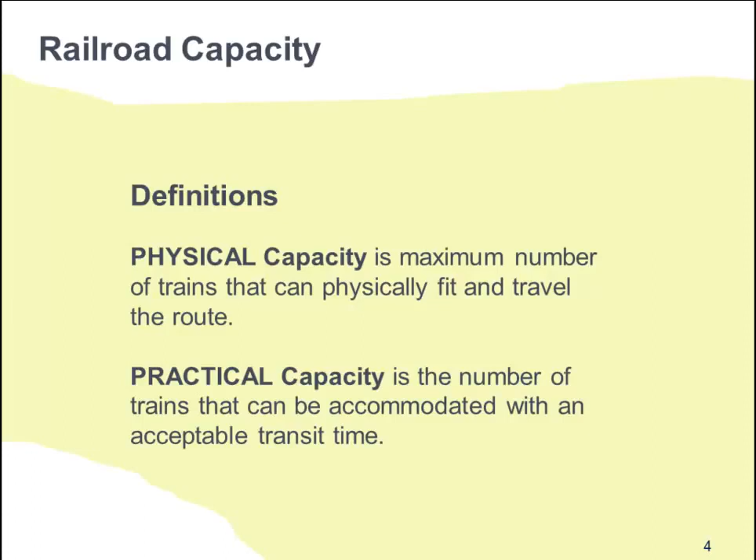In trying to manage capacity, whether one is a planner or a dispatcher, the challenges include balancing trains throughout the day, accommodating maintenance and inspections, and dealing with operational irregularities and anomalies, all while keeping acceptable transit times for the various trains. So, Dick, to manage railroad capacity, we usually think about things like how is the capacity used, how can we make the best use of it, how do we know when it's necessary to increase it. Are there any overarching comments that you think would be helpful for our listeners?

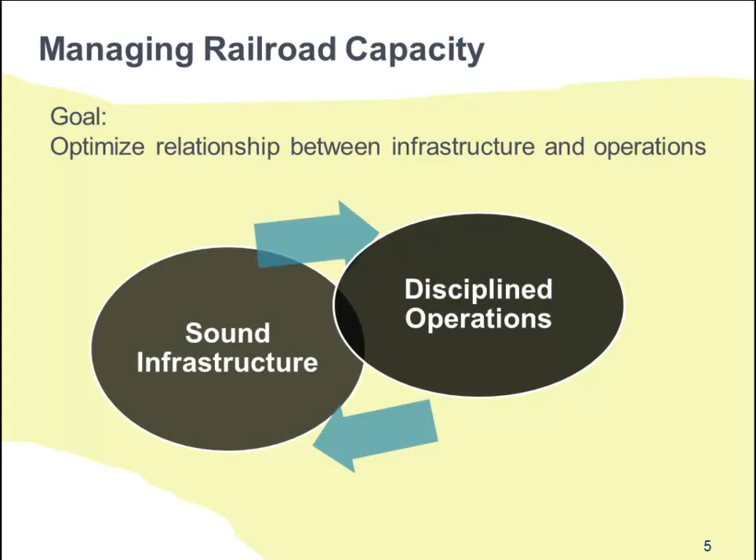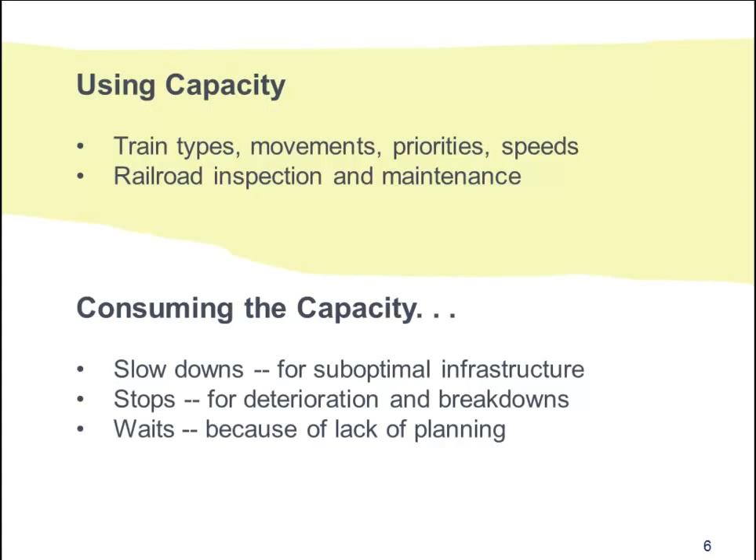Well, the way to best use the existing capacity is to optimize the relationship between infrastructure and operations. We will first show a number of examples of the productive use of capacity by trains and maintenance, and then we will show how capacity is really consumed by suboptimal infrastructure, deterioration, breakdowns, and lack of planning for operations.

In the Train Types and Performance webinar, we of course recognize trains as the prime user of the railroad. We discussed how it is critical to keep in mind the characteristic movements of the various trains in order to optimize the use of railroad space and time. And I'll recap the train types and their characteristics.

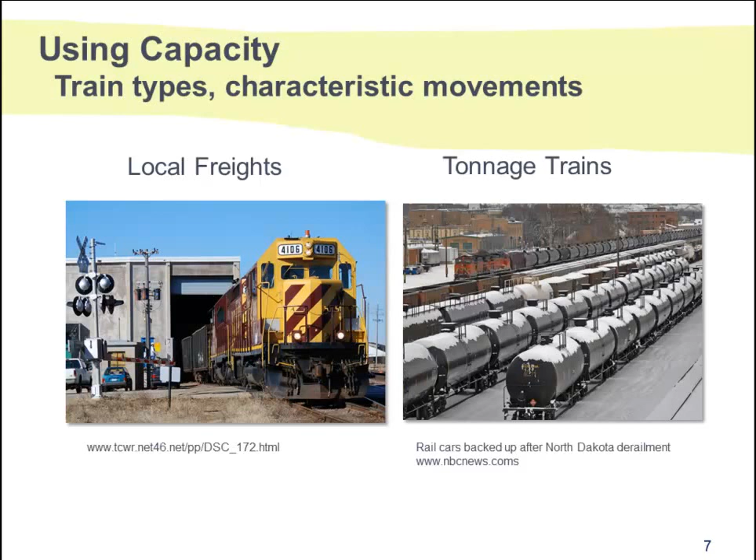Let's start with local freights. They travel between 5 and 10 miles per hour and have the lowest priority on the railroad. They can consume massive amounts of railroad capacity because of their slow speeds and frequent stops at industrial sites just off the main line. Tonnage trains usually travel from a single origin to a single destination. Even though their speed averages between 20 and 30 miles per hour, because they carry heavy loads, braking can be difficult. They are not particularly time sensitive. A few hours late is okay.

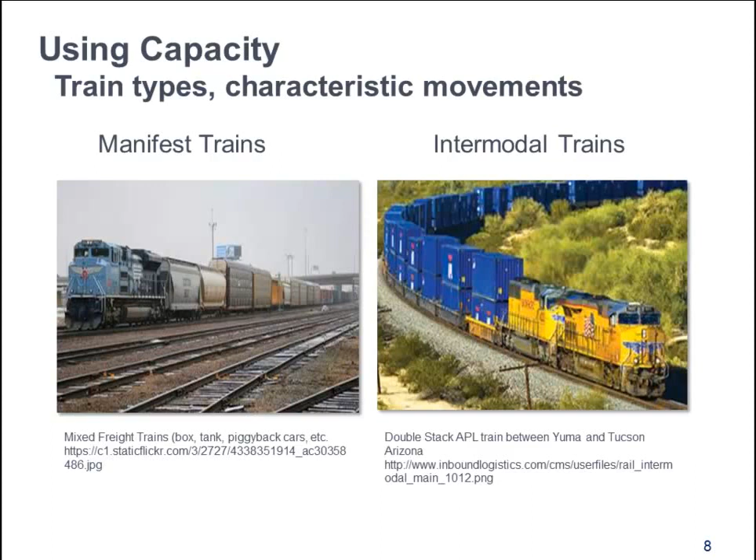Manifest trains pick up groupings of cars at distribution yards. They travel between 30 and 40 miles per hour and carry a variety of cargo, some of which may be time sensitive. Intermodal trains travel at an average of 50 miles per hour. They are the fastest, highest priority freight trains. Compared with other freight trains, intermodal cargo is lighter weight, higher value, traveling farther, and on tighter schedules.

And now for the passenger train types. Because of frequent station stops, commuter trains travel at a rather low average speed, 30 to 45 miles per hour. In peak periods, commuter trains use a lot of railroad capacity due to their frequency. Intercity passenger rail trains, by definition, connect two or more metropolitan areas. This category includes four train types.

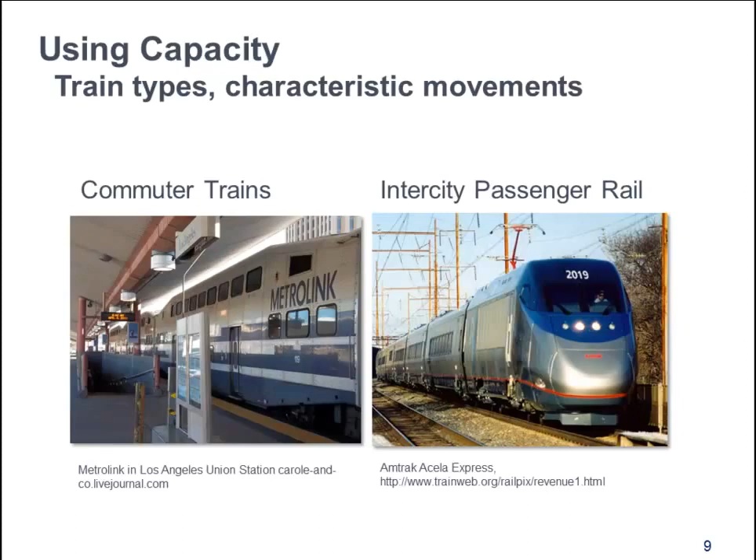Long-haul trains like Chicago to LA, which has a low time sensitivity; an hour late is not unusual. Short-haul trains like Washington to Baltimore, which are time sensitive. Higher speed trains like Acela from Washington to Boston, maximum of 150 miles per hour, which are very time sensitive. And high speed like the future California High Speed Rail from San Francisco to LA, which is over 200 miles per hour maximum, which is extremely time sensitive.

All right, thanks. Well, let's move on now to another use, which is railroad inspection. Track inspection per 49 CFR Part 213.233 is driven by the class and type of track and whether the track carries freight or passenger or both. Mainline tracks carrying passenger trains are required to be inspected twice weekly via high rail cars, like the ones shown on the slide. Tracks higher than Class 5 require track geometry checks and other types of checks.

Suffice it to say that on the main lines, the inspection via a high rail truck at 10 miles an hour takes a lot of railroad capacity. And if something needs to be fixed, even more time is consumed.

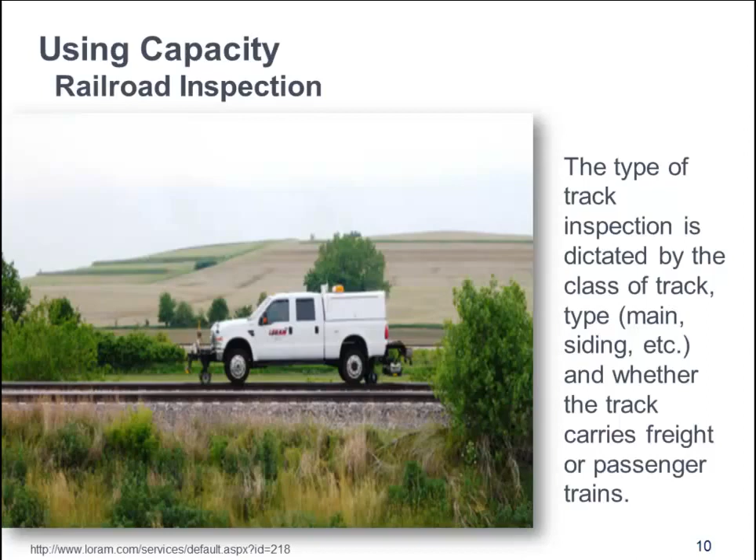And of course, inspections take place during daylight hours, which is prime time for train movements, especially passenger trains. So, the last part of using capacity, we're going to talk about railroad maintenance. Note that heavy maintenance, such as tie and rail replacement, or work requiring large on-track equipment, typically is scheduled for 8 hours of uninterrupted time. Double-track maintenance requires worker protection, flagmen, and horns to clear the track being maintained, while a train moves on the other track. Maintenance on a single-track railroad usually takes the track out of service completely.

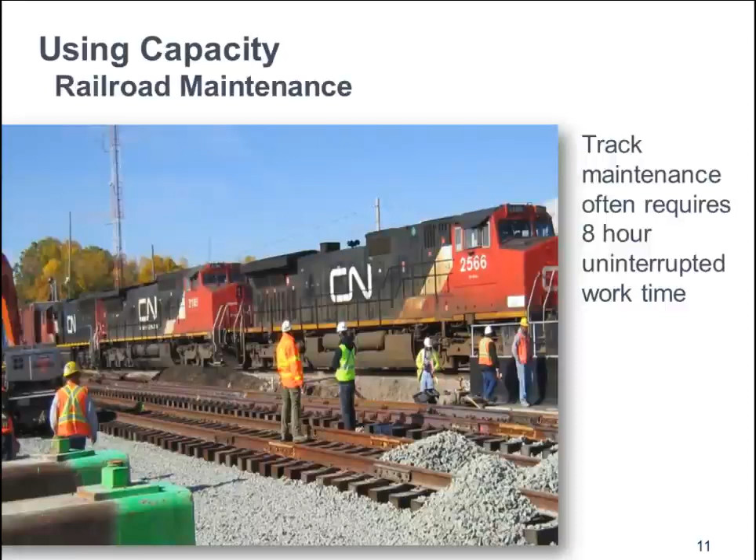Well, thanks, Dick. Now let's talk about consuming capacity, which is the less productive, inefficient uses of railroad capacity. All right, first up is an example of single-sided platform consuming capacity. Okay, we see the negative operational effects of this situation on many corridors. A single-sided station platform can change the whole traffic pattern, especially with commuter rail, because of the frequency of the headways, and the operational effects can be huge.

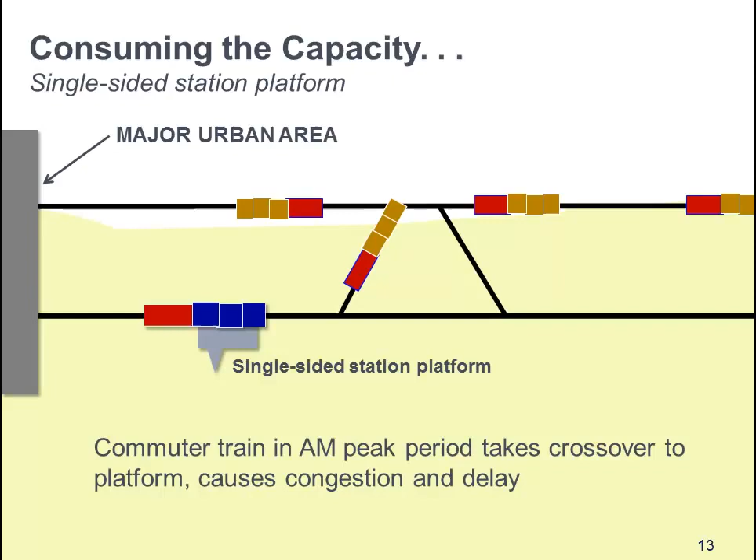In the diagram shown, an inbound commuter train in the morning peak is on its way to a major urban area. The commuter train has to cross over to access the platform. All the inbound and intercity trains have to follow, and this, of course, is on a double-track railroad. Meanwhile, outbound trains wait to make the crossover move in the other direction. How can we make better use of the existing capacity? Simply installing a platform on both tracks at the station is the obvious answer. This is a relatively inexpensive improvement that benefits all traffic on the corridor.

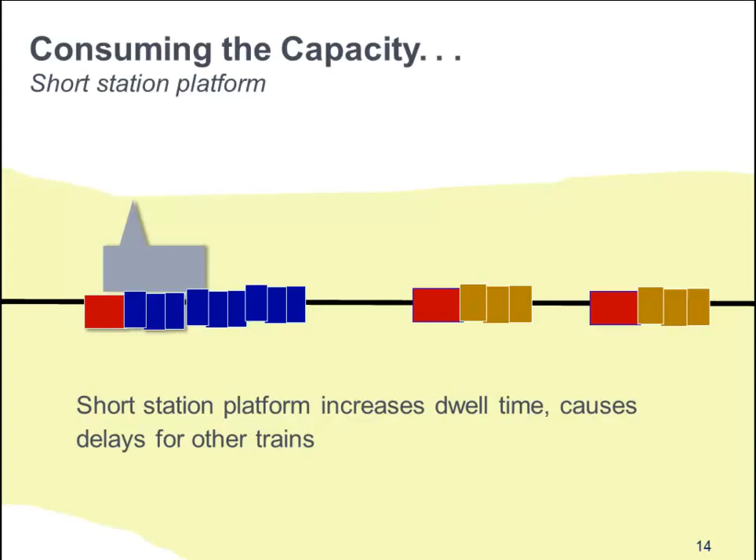And our second example is about platforms that are shorter than the train. Certainly, when the train is longer than the platform, passengers have to move to the front of the train to exit, or whatever doors are open. And boarding is also more bunched on the platform. This all produces longer dwell times as a result. If the station is on the main line, longer dwell times become delays for all the traffic on the main line.

All right, and this is the third example here. We have suboptimal infrastructure conditions, and we talked about that in the track configuration webinar. Yes, each condition slows train speeds on the main line. As we discussed in the track configuration webinar, remedies include adding bidirectional signals and signalizing passing tracks at an appropriate spacing.

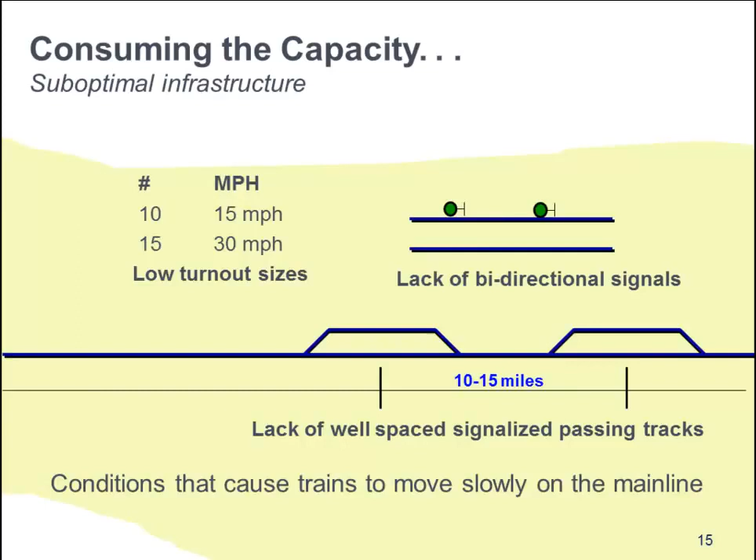So here are two examples about parking on the main line. What's that about? Yes, in both of these cases, the main line is essentially used as a rest stop. The first is caused by the absence of a holding area. As an example, at a transfer point like Chicago, if you have unit coal trains coming from the west and the cars are to be transferred to another railroad and the receiving company is not ready to take the cars, they can be parked on the main line. Doesn't this mean that one of the mains in the double-track railroad is out of service? You got it. Construction of holding areas or yards takes acreage and money, but it can save a lot of railroad capacity.

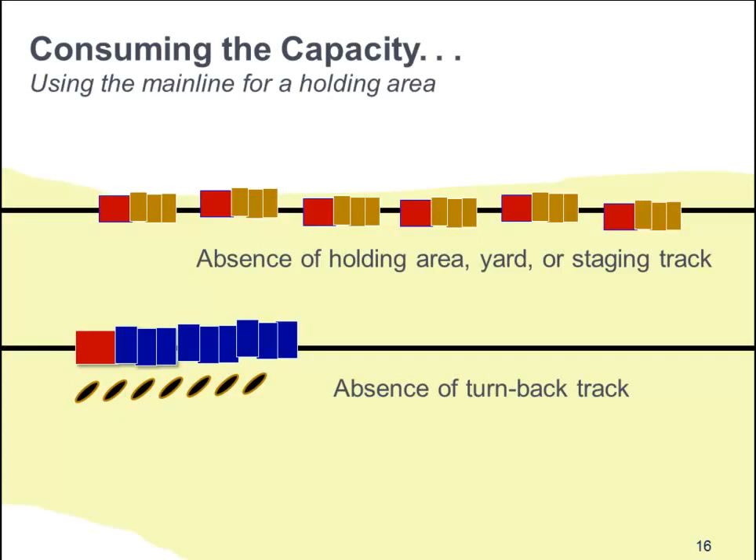The second example of parking on the main line is caused by the absence of a turnback track. In many corridors, we see commuter trains, especially zone express commuter trains, turning back on the main line. And with commuter express, this can happen 6 or so times in a peak period at both ends of the line? Yes, the negative operational effects on the traffic on the main lines are huge. The remedy, of course, is to install a separate turnback track or spurs so that the train can change direction off the main line without parking on the main line.

All right, we're going to talk about a new category of consuming capacity, and this is around deteriorations and breakdowns. Okay, this slide shows an example of track deterioration. Track defects are a leading cause of train accidents, and when accidents happen, railroad capacity is definitely consumed. The example shown is track buckling. The Volpe Center's 2003 research showed an average of 38 derailments per year due to buckled track. Inspection and maintenance are the only ways to keep track deterioration in check.

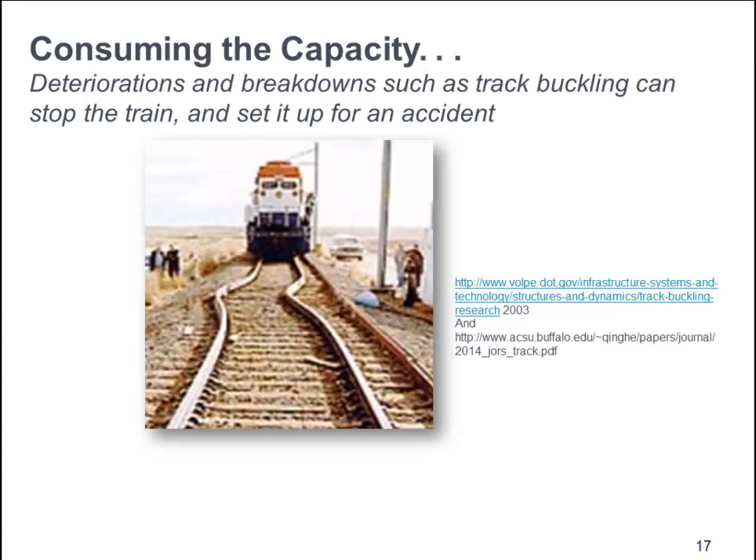What is particularly disturbing about buckled track is that the signal system will not detect the buckling. The rails still conduct the electrical energy in the track circuits, so there is no signal warning for an oncoming train of the conditions ahead of it. So we can also lose capacity from failures in the train equipment itself. Consider this example. During peak periods, the Hudson River tunnel carried 40 to 45,000 travelers per hour. In January 2014, commuters were stranded on a train that lost power and stopped in the tunnel because of a broken catenary wire. And Dick, what's an example of a train control failure?

Well, we had a recent example of a lightning strike that hit a central instrument house of a major interlocking at a junction outside of Boston. The thousands of wires inside the house became a fused mess of copper, causing a massive slowdown of all trains. This was a particularly bad incident. Lightning strikes during summer thunderstorms happen rather frequently on radio towers that dispatchers use to remotely control switches or hit the track circuits.

All right, so now we have the last category of consuming capacity, and that's the lack of planning for operations. Many problems occur because of the lack of planning. Planning does not solve everything, but it can go a long way to avoid unproductive consumption of railroad capacity.

Introducing passenger service on existing freight routes means introducing a uniform schedule into a non-uniform schedule freight world. A disciplined approach is required to ensure the passenger trains run on time. Freight varies greatly by day of week and weight of train.

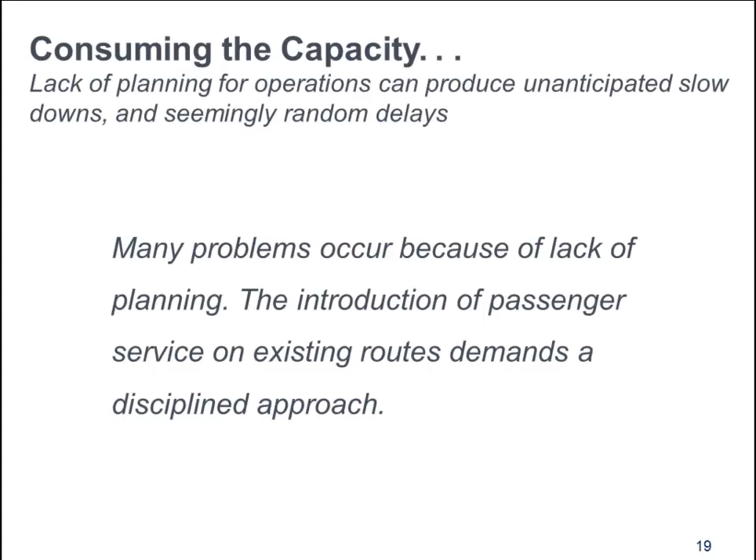Class 1 railroads adhere to a certain amount of scheduling because they have to balance locomotives and crew moves. But Class 2 regional railroads and Class 3 short lines often ignore the benefits that scheduling could bring. The mindset has been, it will get there when it gets there.

Thanks, Dick. Well, now we're going to move on to how to manage capacity. And what are the building blocks and tools we're going to use? Well, to move towards a more disciplined approach to operations, we will talk about developing a schedule. Then we will touch on TPC, or Train Performance Calculator modeling of a single train, and RTC, or Rail Traffic Controller modeling of all the train traffic on a corridor. For planners and engineers who are developing new service, the schedule, the TPC, and the RTC are important tools.

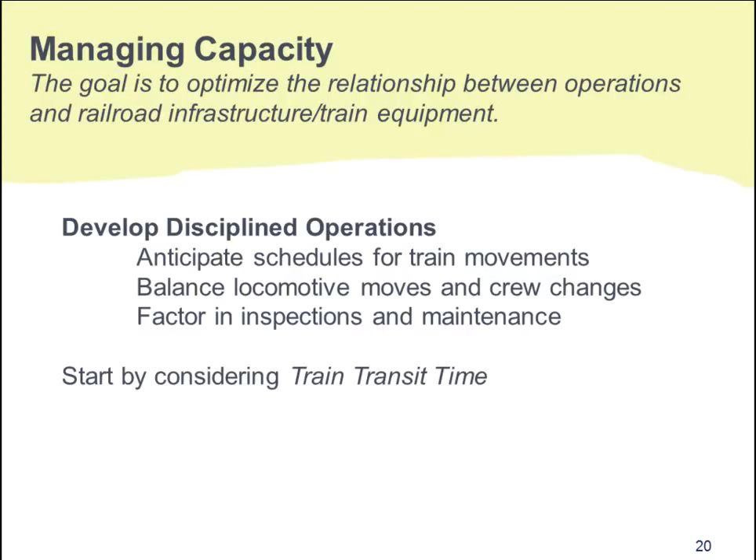To start, however, let's look at the aspects that make up train transit time. What is train transit time? Train transit time is the time a train or trains can reasonably expect to travel a certain route given various factors such as the type of the train, the minimum run time or free running time, stopping distances, slowing or speed restrictions, and other expected delays over the route.

When considering all trains together in a corridor, transit time becomes a function of the number and kinds of trains on the corridor, their speeds, their stopping patterns, priorities, whether they have a uniform or non-uniform schedule, how they interact with other trains, which includes the train densities, potential anomalies, headways, overtakes, crew time limits.

All right, thanks. So let's start with the headways. What is a headway? How can planners and engineers use headways to make efficient use of the railroad capacity? A headway is the time between two successive trains operating on a railroad. An ideal headway is the time between trains that is required to avoid signal restrictions without hitting a yellow signal or a red signal that would slow them down or cause them to stop.

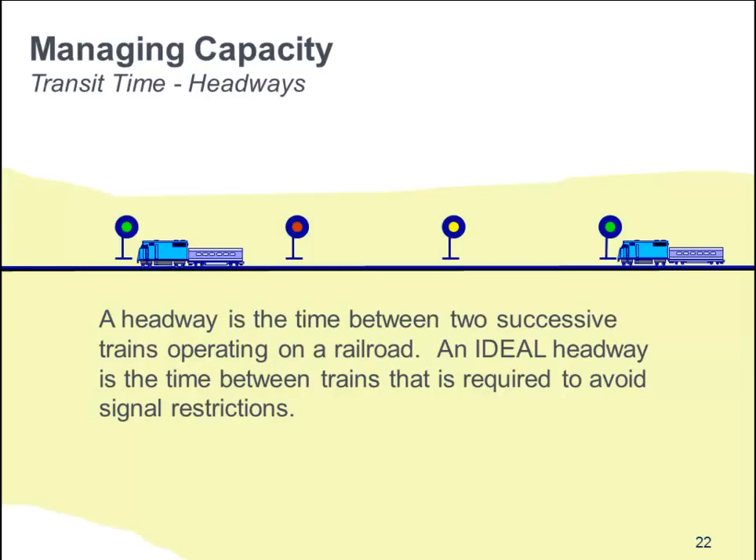As a general rule, closer spacing of signals permits more trains in a set period of time. So closer spacing of signals is a way to increase capacity. But of course, you still have to provide for the worst case braking train distance out there to set the block length. All right, let's now move on to overtakes and meets.

This diagram shows a passenger train overtaking a freight train. The freight train moves into the passing track. Planners and designers have to identify where it would be efficient for a passenger train to overtake a freight, don't they? Yes, a good example would be from San Antonio to Houston. This is a 200-mile long route for a passenger train with no intermediate station stops. As the passenger trains typically run at 79 miles an hour on this route, this is a good candidate location for overtaking freight trains.

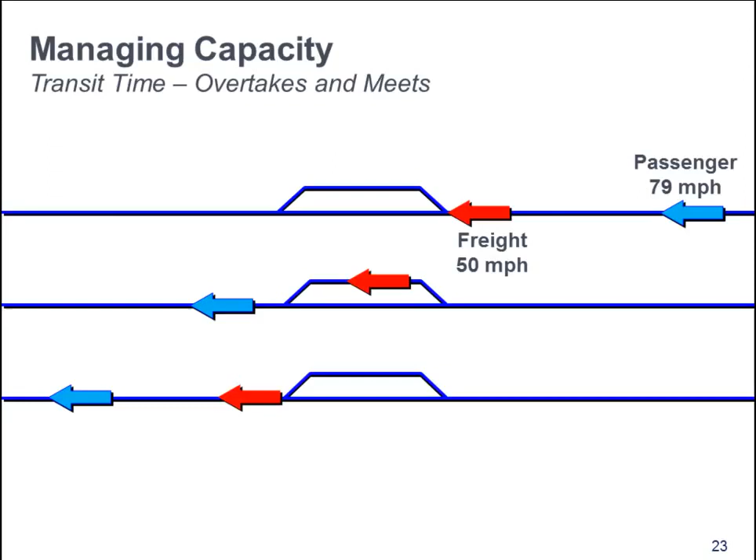All right, so this diagram shows meets where the lines are crossing. And Dick, why is this called a best case scenario? Well, this diagram shows a best case condition. Trains are running in opposite directions at exactly the same speed and able to pass each other without delays at the appropriate passing tracks. They take turns using the passing tracks.

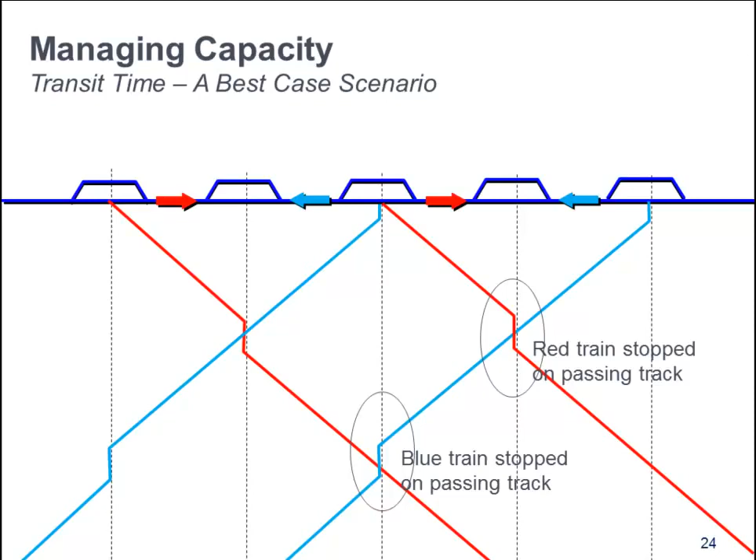In reality, trains do not operate at the same speeds because of constraints from grades, temporary speed restrictions, inefficient siding placements, and passenger station stops. All right, so here we're going to show the real world of delays. Yes, with a single track railroad, overtakes are common. When you also have to have meets, this can be challenging.

In the diagram, trains A and C will meet. Also, C is overtaking B. Consider that even if the railroad has signalized passing tracks every 10 miles, if they are occupied to allow overtakes, the meets can occur only at every other passing track, that is, every 20 miles.

This slide shows the delay experienced by train A because of the time required for trains B and C to pass through. While train C may go 90 miles per hour, train B, the freight train, may only be traveling at 30 miles per hour. This is the time dimension that dispatchers and planners need to consider.

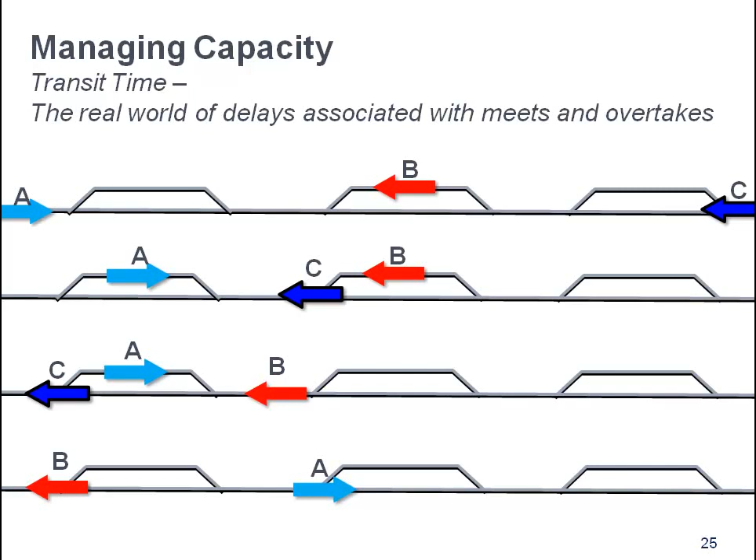Let's look at train interaction and train speeds and stopping patterns. This graphic shows a ranking of the average effective speeds of trains from high-speed passenger trains to the slowest local freight trains. The pattern of dots for each type of train represents how often and how long they stop. Compare the stopping patterns. Local commuter and local freights obviously have lots of intermediate stops. High-speed rail and intermodal freights have typically more end-to-end stops.

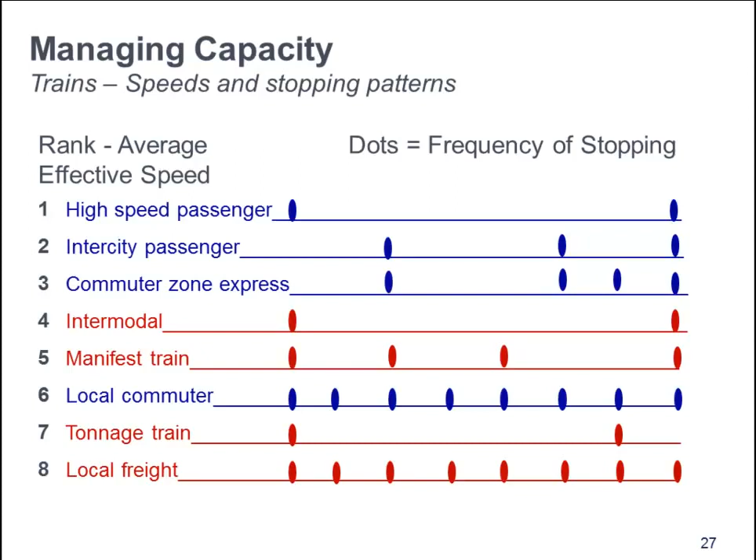This speed and stopping info are key inputs to dispatchers' strategies to keep trains moving along, aren't they? Yes, absolutely. And for those planning new services, they are key inputs to the development of schedules and model runs. All right, Dick and Jared, could you explain this table of expected speeds given various densities of freight traffic? These are sort of rules of thumb for corridors with heavy, medium, and light freight traffic.

In corridors with very heavy freight traffic, like the CSX corridor from Buffalo to Albany with 40 to 60 or more freight trains per day, the passenger trains may not be able to run at their highest efficiency. If they achieve an average speed of 60 miles an hour, that is pretty good. In the design of track and signals, priority should be given to the freight trains. In medium freight traffic, with 10 to 20 freight trains per day, the designer would try to achieve good efficiency for both passenger and freight and expect a 60 mile per hour average speed for passenger trains.

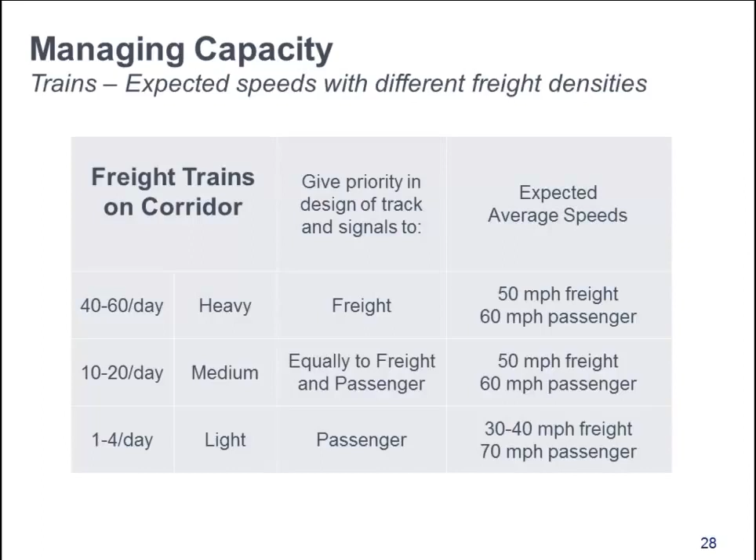In light freight traffic, with only 1 to 4 freight trains per day, the design of the signals and track would normally give priority to the passenger trains, and an average speed of 70 miles an hour would be reasonably expected. Well, thanks. So we also have to consider the crew on-duty limit, which is 12 hours. How do the on-duty limits affect the management of the railroad capacity?

Well, the crew limits can affect railroad capacity when problems crop up and things take longer than expected. As an example, if a freight train blows an air hose somewhere, the train comes to a stop. It can take up to 90 minutes or so to find and fix the problem because somebody has to walk the train to find it. Given this delay, the crew may now not get to its destination before the 12-hour time limit expires.

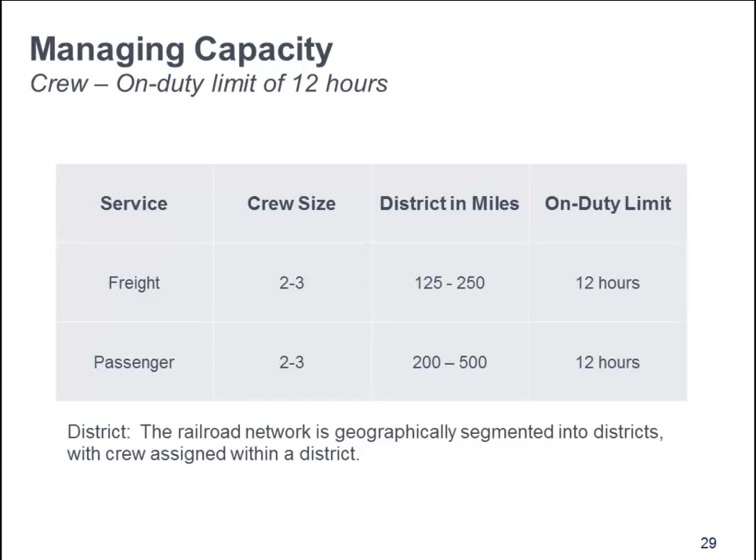And if the train can't even make it to a crew change point, which is typically a major stop like Richmond, Virginia, the train stops out in the countryside. While a new crew is brought out, the train is sitting on the main line, tying up railroad capacity, and nobody is moving. So putting all these factors associated with the train transit time together, how does one begin making a schedule? Well, there are basically two approaches.

For an existing, heavily used freight line to which passenger service will be added, you can start by documenting the average number of freight trains, estimate their departure times from major terminals and yards, and build in delays. Then add in the passenger service. Can't you also start with the passenger trains? Yes, but this is more commonly done in a light-density freight environment. That can be a good way to start. Once the passenger trains are set, add the freight trains and related considerations, then estimate delays. Then fine-tune the station dwell times.

Typically for passenger convenience, trains leave stations in the morning after 6 a.m. and hopefully arrive before midnight. People just don't like getting on trains before 6 a.m. or after midnight. So we also have tools, which you had mentioned before, but how do the modeling and simulation tools help with managing capacities? Well, these tools, the simulation tools, bring time and space together.

The TPC, or Train Performance Calculator, models one train at a time, taking into account various speeds, grades, braking distances, station dwell times, etc. It does not factor in other traffic. It will give you a perfect running time. For that reason and others, TPC results are too perfect. FRA typically requires at least a 7% pad be added to the TPC results. You can check the FRA website, the 2005 Guidance Manual for Rail Corridor Transportation Plans, for more information on the 7%.

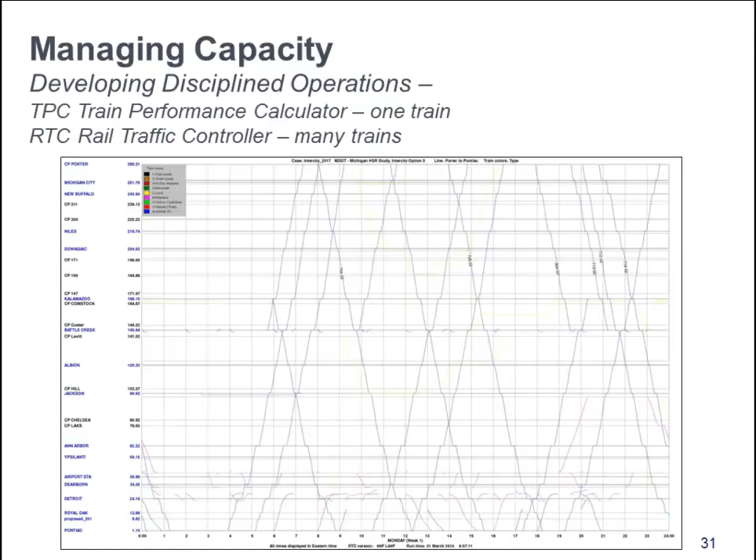Adding new service, for example, 2 or more passenger trains per day, could increase the delays. Adding passing tracks or making other adjustments to the infrastructure could reduce these delays. All right, Dick. So I thank you for all that. I can see that this is a very complicated topic. How would you sum up what we've just talked about today?

It is complicated. In the meantime, we would encourage planners and engineers working on projects to think like a dispatcher. Take stock of what is out there, how each train moves, and the time it takes for each move. Remember, the dispatcher lives in Einstein's fourth dimension. Time, time, time. He doesn't care about distance. It's a juggling act that he has to put up with.